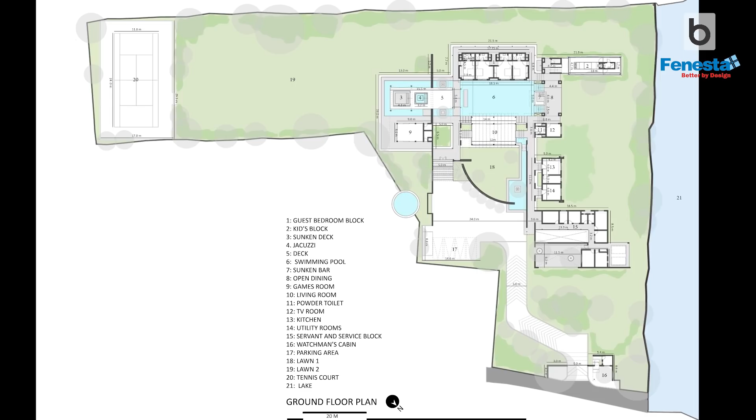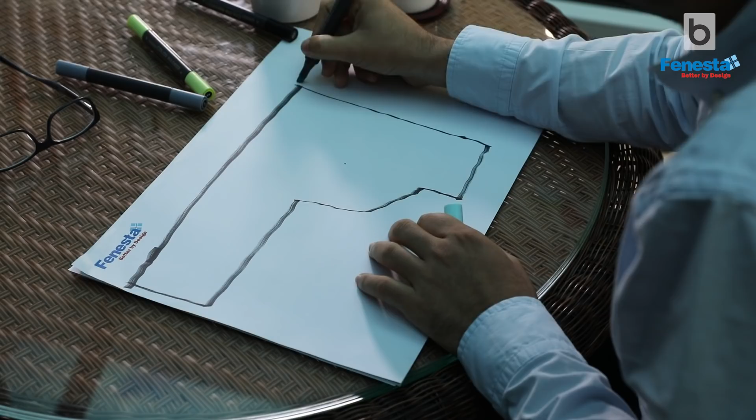So the site is located in Alibag. It's an interesting 1.5 acre site, and as an architect, when you visit any site, you're searching for certain clues that the site can give you itself. This site was very interesting in that sense. We had a seasonal lake located along one edge completely, and interestingly, from the roadside, you were blessed with a clump of trees and vegetation which you had to deal with.

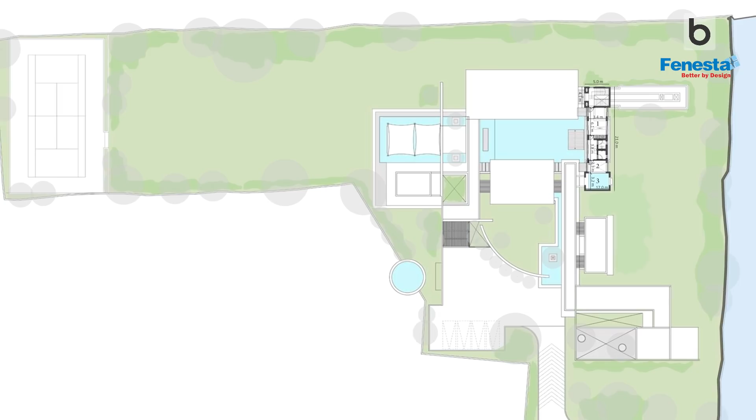Also, in terms of its directions, we're looking at this being the north. So we were dealing with the south being open. We needed to shield the building from the southwest monsoons. We had a nice stretch of land which almost gave us this axis to work with, to say, how do you work with this longitudinal axis? And that became the starting point for us to site the building and work with it.

So what we started doing was, we first snaked our way past the clump of trees, and we decided that you must come to an arrival zone, like an arrival plaza. And once you've decided that, how do you hold that arrival plaza? So the idea was, can we come with a curved wall that receives it, and a linear wall? So it's between these two frames that you are received.

The curved wall also dips down. It rises from a big height of about 5 meters and comes down to about 3 meters high, where you have the entrance canopy. This is where you enter into the house. Now, most of the house has been designed like a pavilion. When we say it's a pavilion, it's groups of functions which have been clustered together. So you had the guest room facility at one end, and opposite the guest room facility, we had the formal living and the dining facility.

What we did strategically, as the client had always envisaged the pool as the main activity of the house, we ensured that the pool was located right in the middle of these two activities, because we wanted the guests to get up in the morning and feel that they're right next to the water's edge. We wanted the living dining to have a deck which would then become an extension of the pool activities.

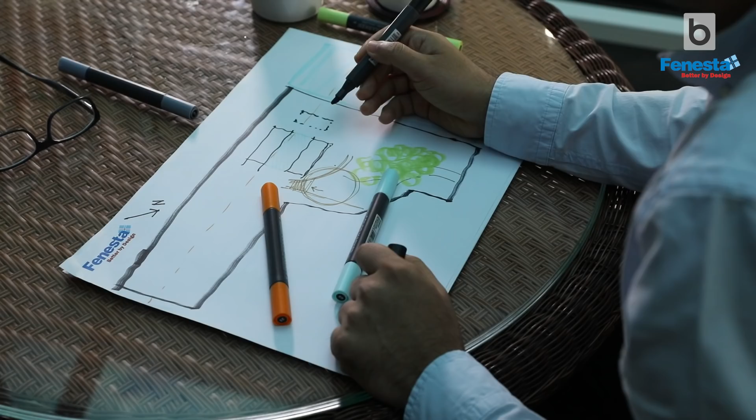But what we also did, to reinforce, as I said, the axis of the pool, is we lifted the master bedroom block onto a stilt, and the kids' bedroom is taken at a mid landing.

So the staircase block kind of happens right there, and you access through the staircase, you come to a mid-landing where you had the children's block, which is now on a cantilever. It's strategically located, and it has the beautiful vantage of looking into this seasonal lake. And likewise, even the master bedroom looked into the seasonal lake, because of its height and its location.

One other important function we had was the games room out here, which was aligned again with the living block. The minute we started placing this, we realized that these individual pavilions needed to be strategically connected. And that began the exercise of connecting it with a strong spine. So you had the circulation spine that got defined, and through that circulation spine, everything was accessed.

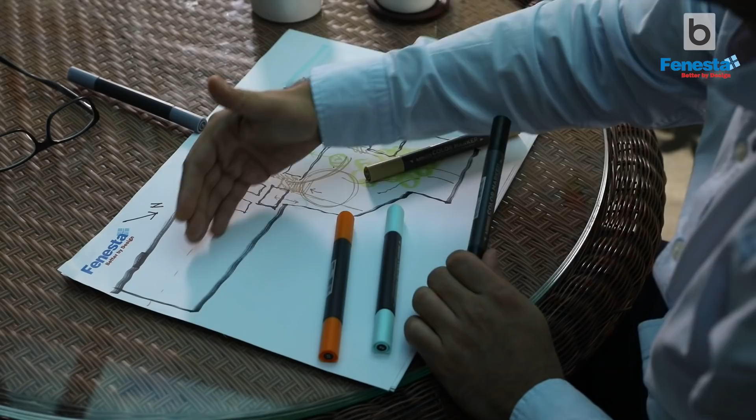What was then nice is the curved wall had formed an intimate courtyard, which was in direct sight of the glass pavilion, which was the living pavilion. And finally, on the axis of the pool, we had an outdoor jacuzzi and a sunken seating. All again, as I mentioned, on the same axis to further reinforce it.

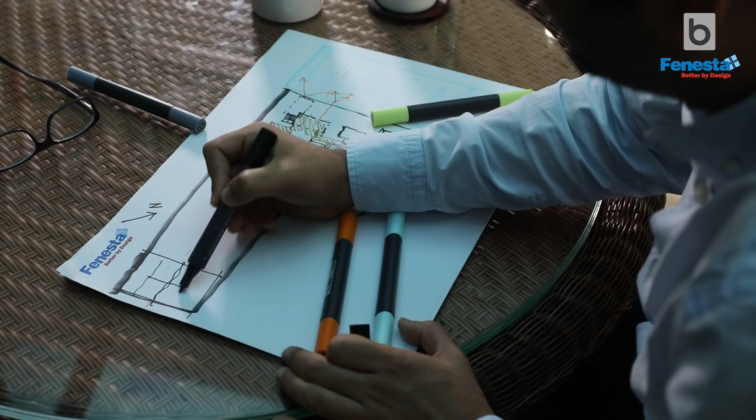The client, through the project, was talking about how they love playing badminton and tennis. So we debated about both these facilities being incorporated into the project. And finally, what got accommodated was a tennis court. And this was by sheer luck in its length, in its orientation, everything, that we were able to put it right at the end of it.

But what again worked to our advantage is it was on the axis of the pool. So we created a sense of walkway and a pavilion, a gazebo, through which you enter into it. So the spine and this axis got further well defined for us.

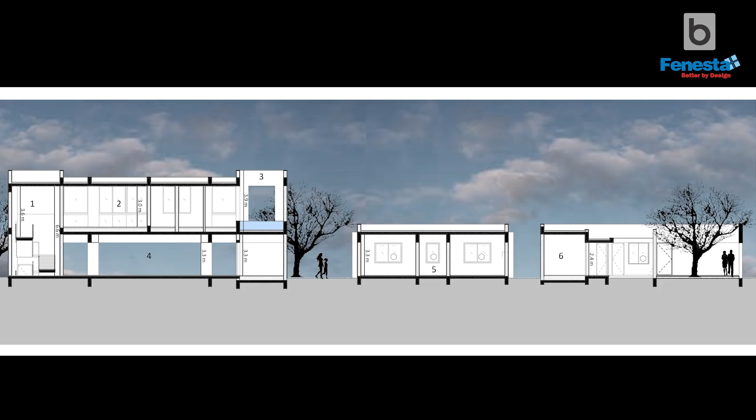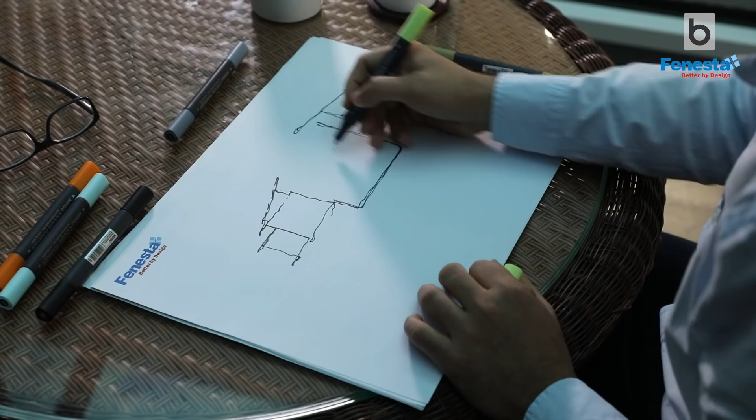The structure currently, the way it is placed, you had the guest block facility with its lean-to roof and its flat corridor. But you have the water facility, that is the pool, engaging with the deck of the glass pavilion of the formal living room. And then you have the curved wall. So the idea was that if we treated the living pavilion as a glass block, the weather is unforgiving in Alibag, and you have extreme climatic conditions like the rain as well as the heat.

So what we did is we created a brise soleil on the south facade, which is a screen-like element which gives us the right amount of shading right across the pavilion. But at the same time, being a glass box, it engaged with the courtyard, which was held together by the curved wall that we had created.

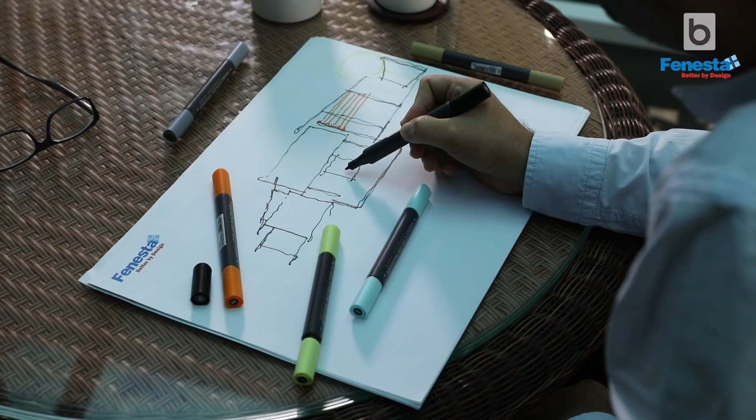At the same time, the pool had a pool bar strategically located, and the fact that the master bedroom was taken onto a stilted format allowed the openness and the transparencies to happen. The pool bar also has adjacency with the outdoor dining facility.

So the whole activity shifts from a morning breakfast, which happens underneath the stilt, to an afternoon session, which probably, because of the heat, moves into this glass pavilion box. And then towards the evening it moves into the sunken seating we created, with a tensile roof. So the idea is that you create episodes and memories for your inhabitants, where they can engage in different time spans differently.